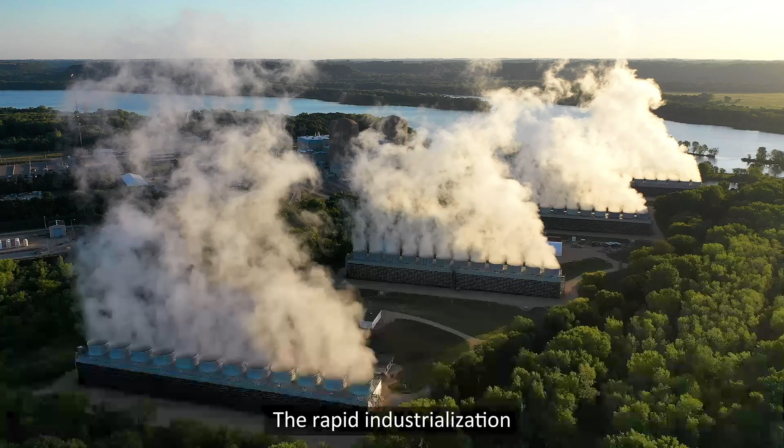However, all these improvements have come at a cost to our home, Earth. The rapid industrialization and increased energy consumption have led to a surge in greenhouse gas emissions. These emissions are the primary drivers of global warming, causing severe climatic changes. With the growing impact of climate change, the need for sustainable practices in shipping has never been more critical.

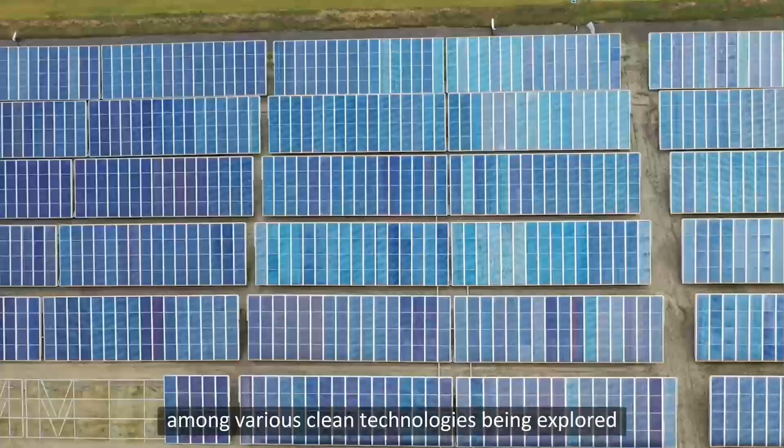Among various clean technologies being explored, one solution stands out as a key to decarbonizing the maritime sector. Green maritime fuel is emerging as a pivotal solution. These fuels significantly reduce emissions, offering a sustainable alternative to conventional fuels. In Singapore, a leading maritime hub, the push for green shipping is taking center stage. New small service vessels, like harbor crafts, are mandated to be green by 2030.

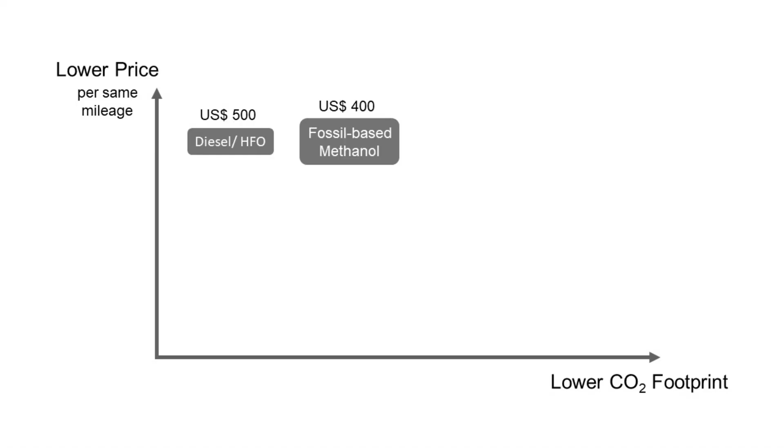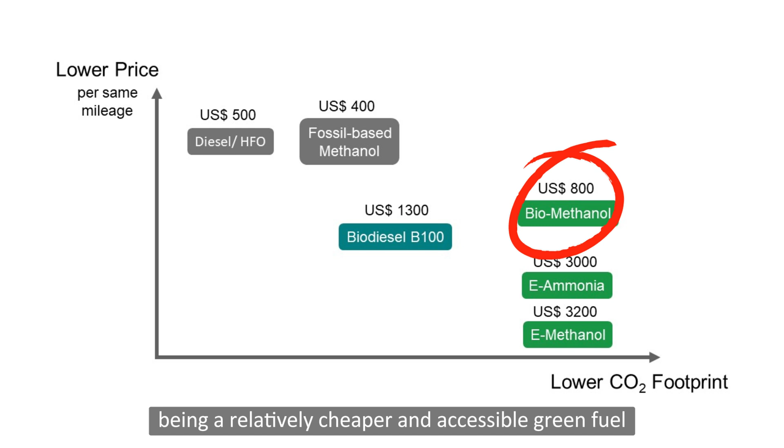But we all know that renewable electricity is not viable for long-haul ships like container ships. This is where biofuels come into play, offering a crucial solution for decarbonizing the maritime industry. However, biodiesel B100 costs double that of standard diesel, making it a significant financial burden for shipowners. Among various renewable fuel choices, methanol, being a relatively cheaper and accessible green fuel, becomes a promising green fuel of choice to help accelerate the decarbonization transition in the maritime sector.

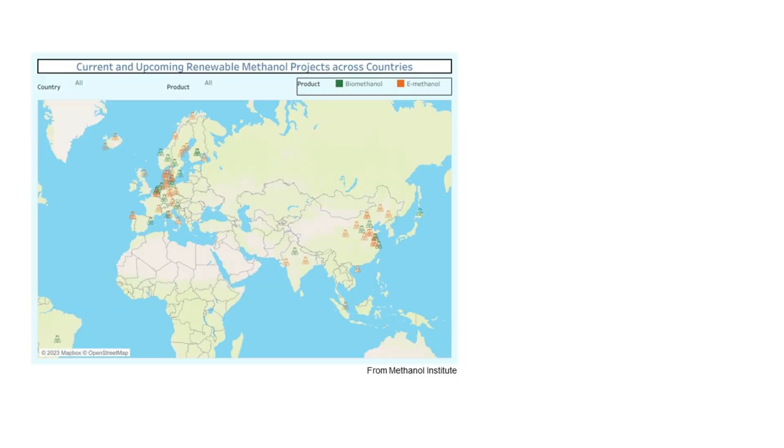In fact, methanol is a key building block in the manufacturing of countless everyday products. From paints and carpeting to plastics and more, methanol is everywhere. But are we doing enough? Renewable methanol projects, primarily in Europe and Asia, account for just 0.2% of total methanol supply, a fraction too small if green methanol is to become a viable fuel alternative. The main hurdle is the production cost. Renewable methanol, including e-methanol and bio-methanol, is currently more than twice as expensive as fossil-based methanol.

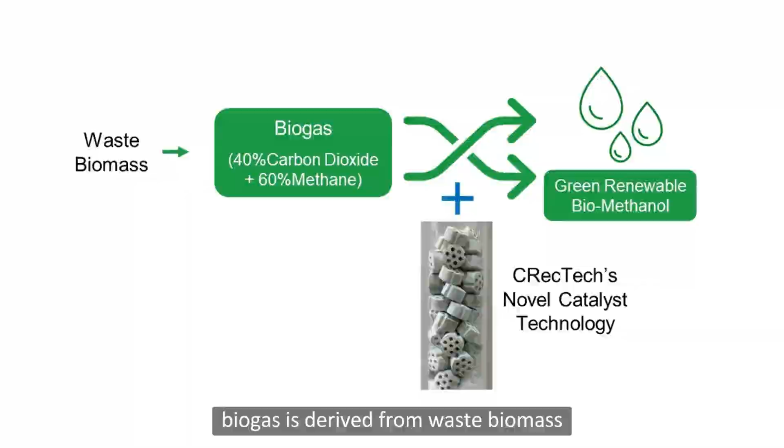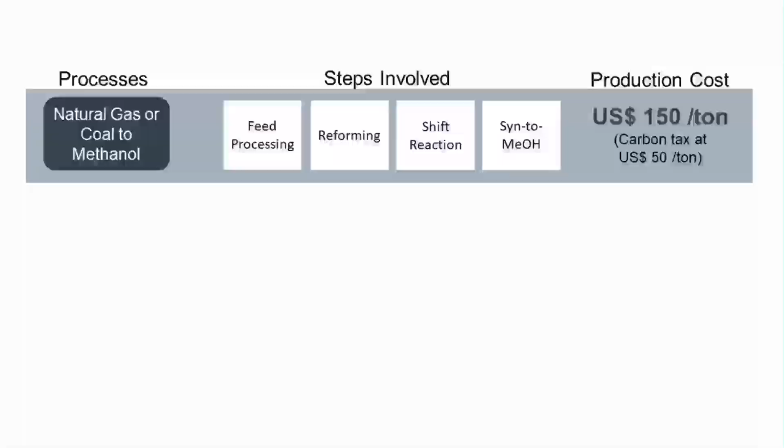CRecTech produces affordable biomethanol using our novel catalyst technology by converting biogas, a mixture of carbon dioxide and methane. Biogas is derived from waste biomass, such as agricultural waste. Our process allows for cheaper methanol production. Our process is scalable, and the methanol that we produce is industrial grade. Today's fossil-based methanol and biomethanol are produced via a complex, multi-equipment four-step process.

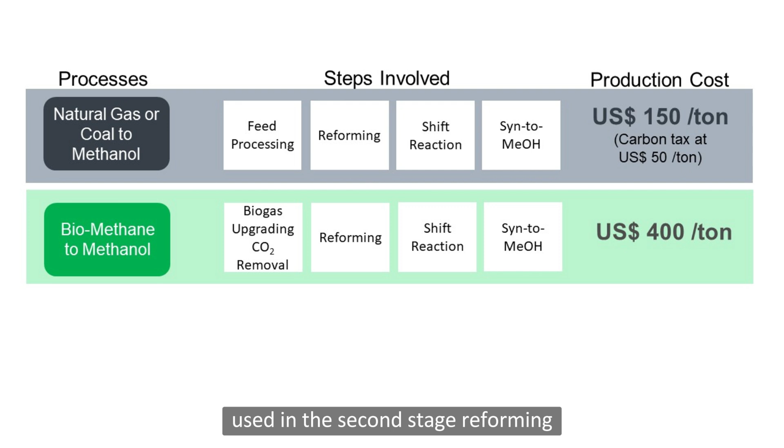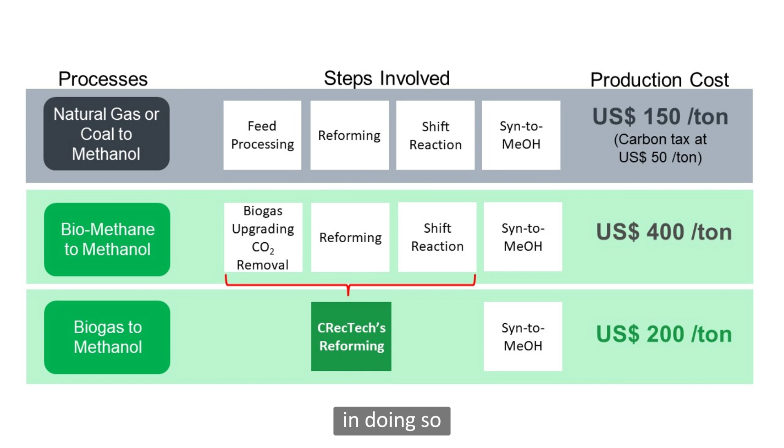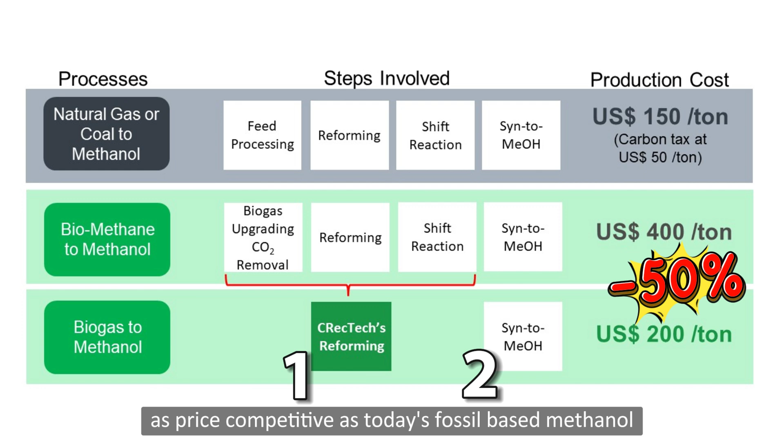For biomethanol production, CO2 removal in the first step is important as it deactivates the conventional commercial catalysts used in the second stage reforming. At CRecTech, the catalyst we developed has strong resistance against CO2-induced catalyst deactivation, and we take it a step further by using CO2 beneficially as an activating agent. In doing so, we are able to simplify the process significantly to only a two-step process, slashing capex and opex by at least 50% to give biomethanol as price competitive as today's fossil-based methanol.

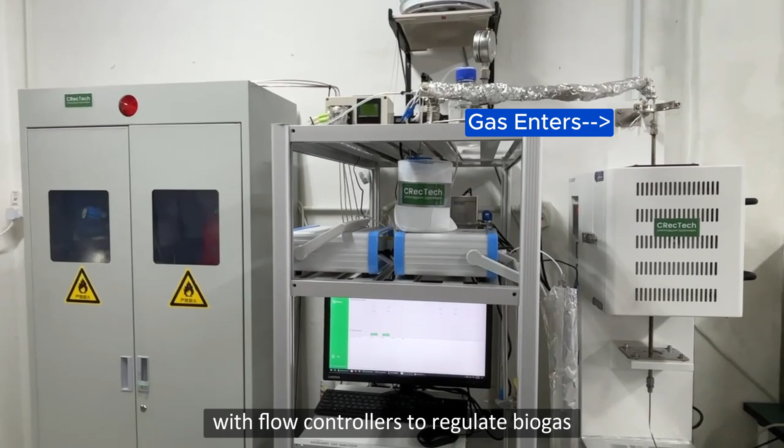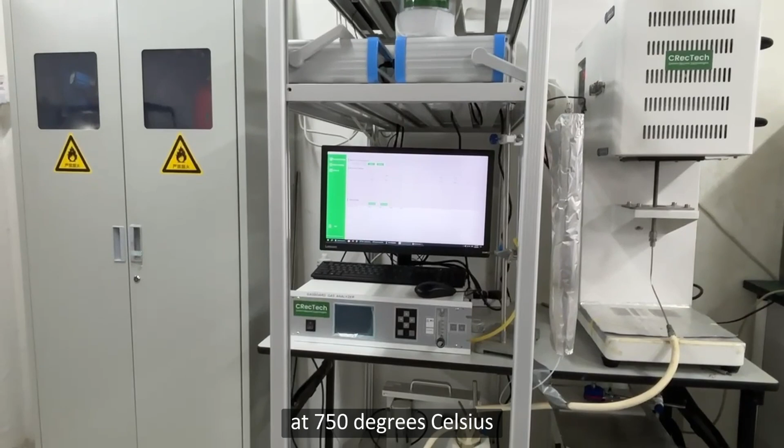CRecTech biomethanol production technology is validated in a lab-scale reactor system, with flow controllers to regulate biogas and steam into a high-temperature reactor. CRecTech biogas reforming features our patent-pending biogas reforming catalyst. The reaction is performed at conventionally lower reaction temperatures, at 750 degrees Celsius, with an optimal steam-to-carbon ratio.

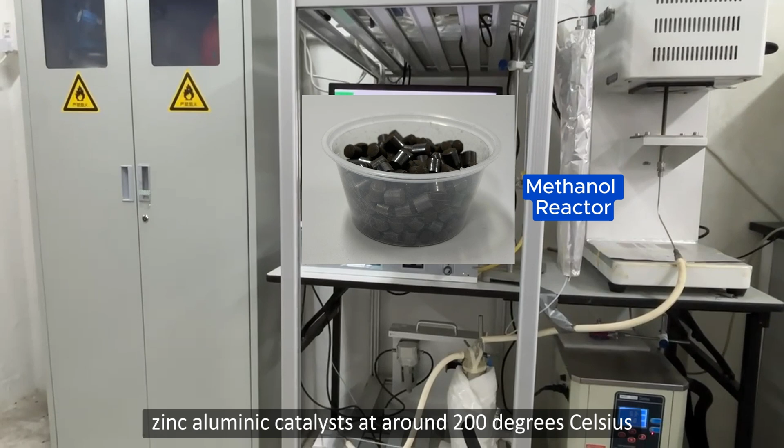Wet synthesis gas, a mixture of hydrogen and carbon monoxide, exits the reforming reactor and dehumidifies in a chiller before entering a second-stage reactor containing commercial copper-zinc alumina catalysts at around 200 degrees Celsius. Methanol is produced at this stage, and stored in a chiller under a cooling bath. The gas effluent compositions are constantly monitored with a gas analyzer.

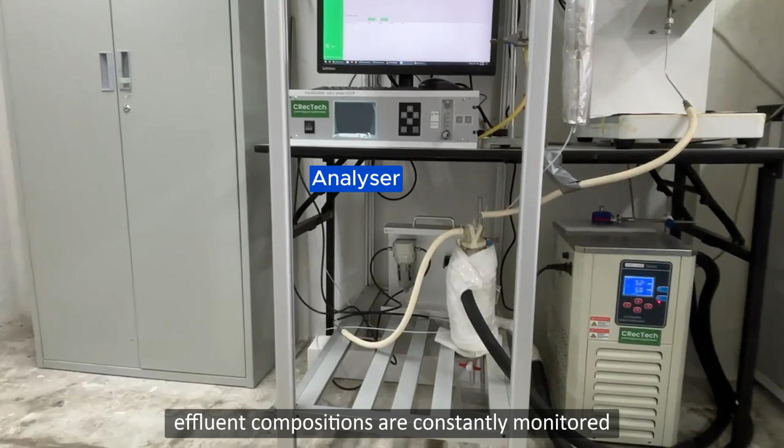The maritime industry consumes about 330 million tons of marine diesel annually, and each marine diesel contributes to about 3.15 kilograms CO2 emission per kg of diesel. This translates to an exorbitant amount of CO2 emissions. Biomethanol produced by CRecTech can reduce carbon footprint significantly, by at least 90%, which equals to around 2.8 kilograms CO2 abatement for every kg of diesel substituted with our green biomethanol.

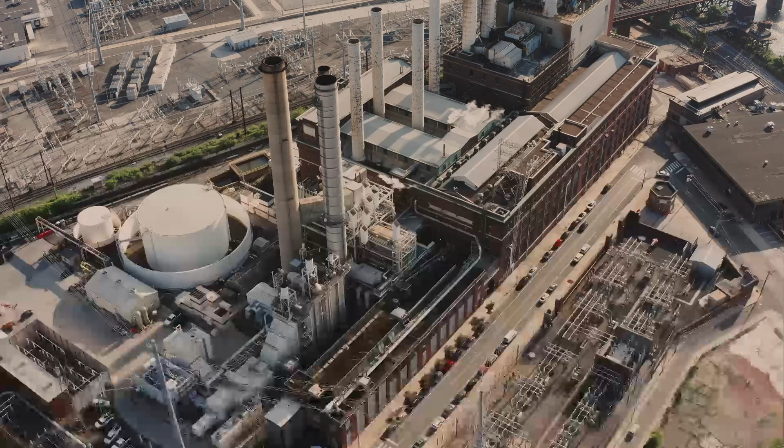If all standard diesel is avoided and substituted with biomethanol, close to 1 billion tons of CO2 emissions can be abated per year. With CRecTech's simple, cost-saving operation, we will accelerate the decarbonization efforts within the maritime and energy industries. By making renewable methanol more accessible and affordable, we are paving the way for cleaner energy alternatives. This innovative technology not only reduces greenhouse gas emissions, but also promotes sustainability and environmental stewardship. Join us in our mission to revolutionize the energy landscape and drive the global transition towards a low-carbon economy.